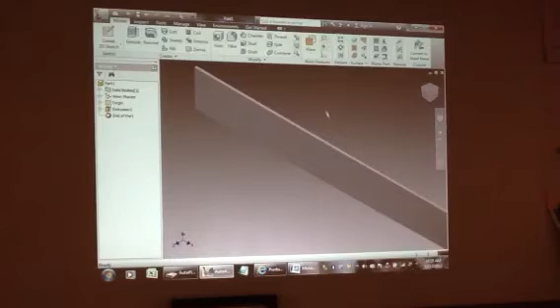I have already an object on here that I'm going to use as a demonstration. It's just a rectangular object that was extruded already, and what I'm going to do is simply click on the surface I want to put the text on, and I'm going to go over to the third option, which is to create a sketch on top of the sketch. I'll go ahead and do that, zoom out a little bit, and then if you want to zero in up here, Michaela, there's an option called text. I'm going to click on that button.

And then I'm going to put my cursor where I would like to have the actual words show up. So I'll click right in the middle here of this object. And then it's going to ask, you can see the cursor flashing right here, what is it that I want to write or have engraved or embossed on the object. So I'm just going to put my name here, Mr. Scholes. And then I have to be very aware of the size of the object I've already made.

And I'm referring to the rectangle that was already on the previous page, or what is actually behind here right now. Right now, the size of the text that's going to show up is only 0.12 inches per letter. That's not going to be big enough for it to show up on the rectangle behind it here. So I'm going to go back through here. I'm going to make it 0.5 inches for each letter as it comes across.

I can also, in this box, adjust the color that I want to show up. It's already set up to be black. Instead, I could make it any color from the spectrum here. I'm going to stick with black for this one, just for the sake of this exercise.

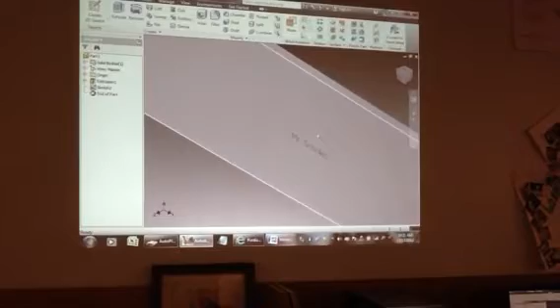Okay, at this point what I could actually do is move this around if I wanted, anywhere I want. Alright, so let's say I want it more at the top. I'll do that. And then, look, zoom in up here, Michaela. This Emboss tool is located right here. I'm going to click on that. I'm going to click on the word Profile twice.

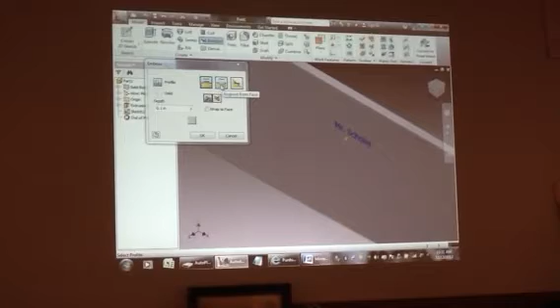Click on my name. And then right here, you have the option to either have the object emboss or come out at you, or you can have it engraved or go in. So let's pick Engrave for this first one. So I'll click that. I'm going to hit OK. It's going to do its thing.

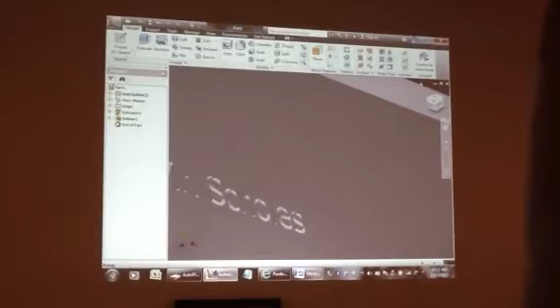Now look, if I zoomed in, like if I looked at it like this, you can't tell a whole lot's happened. But if I rotate this object like this, and then zoom in, you can actually see now that this has in fact been engraved.

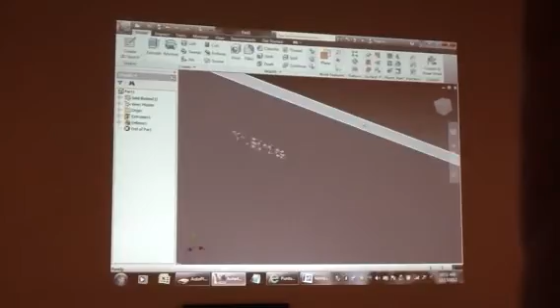I'm going to go back for a second and show you what it would look like if it was embossed. Okay, I'm going to go back to the Emboss tool. Click on my name. I'm going to honor the fact that I want it to come out at me or be embossed. I'm going to hit OK. And this time, instead of going in, you can see in fact that the letters of my name have come out at the person. So you can use this to your advantage either way. But that is essentially how you emboss an object or engrave an object.